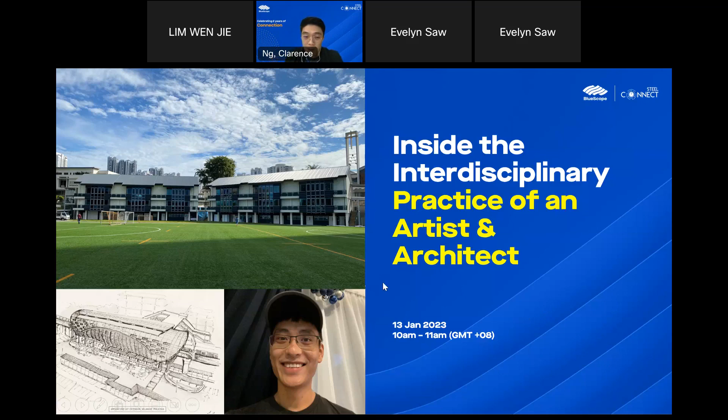Our speaker today is Lim Wen Jie, artist and design architect. He obtained his bachelor's in architecture from USM, and further studies in the Master of Architecture from UTM. As you can see, he's quite a young chap.

One of his accolades is the Asia Young Designer Awards in 2018. He has also obtained the PAM ZSR Architectural Prize and the PAM Innova Scholarship. He has done quite a bit of visual work, some of which has been featured in places like Revitalizing Penang, the 2015 National Top 50 competition winner. He was also interviewed and featured by Sin Chew Daily in 2015. Some of his works were also in exhibitions, like Asia Interface in Straits Harbour, JB, and went international - his artwork of Bukit China Market was exhibited in Slovenia.

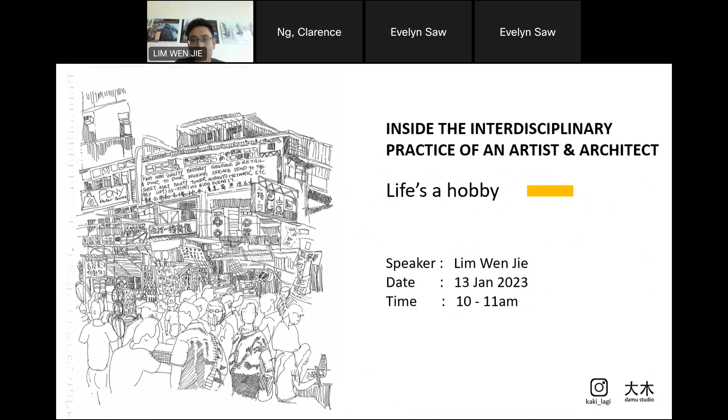Some background about me: I'm a graduate from USM for my bachelor study and currently a Master of Architecture student in UTM. I'm an architectural designer based in Singapore, involved in several projects such as sports and recreational master plans, institutions, residential, factory, and conservation work. I'm also a part-time tutor in Singapore in collaboration with an art enrichment tuition center, and I was an architectural book editor during my master study time. I'm also the founder of Damu Studio, which focuses on architectural work and artwork sharing.

Architecture is one of the classical forms of fine arts and has always had a strong association with the artwork world. So how does art enhance architecture? That's what I want to discuss today. This 45-minute sharing session is classified into three categories: the first chapter is art journey, the second chapter is public engagement, and the third chapter is the architectural path. The final part will be the summary.

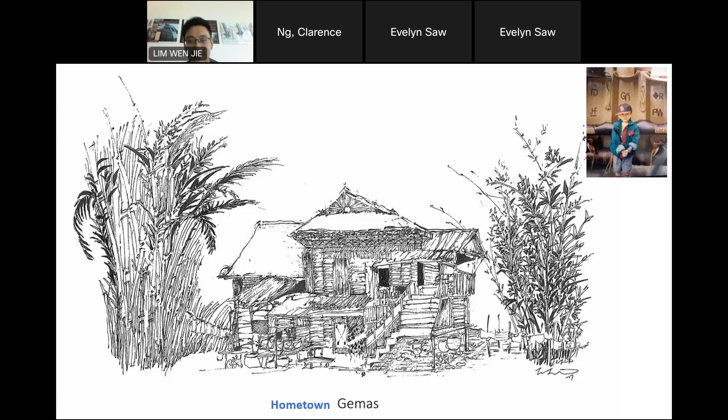In 2013, I managed to enroll in USM for my architectural bachelor study. USM is located in Penang, and Penang is very fun with a lot of good food to eat. I met a bunch of good lecturers and friends there. My first touch of urban sketching was in USM, and that's why I'm here sharing my little thoughts with you all today.

What impressed me most about Penang is the old heritage houses, and it really inspired me a lot.

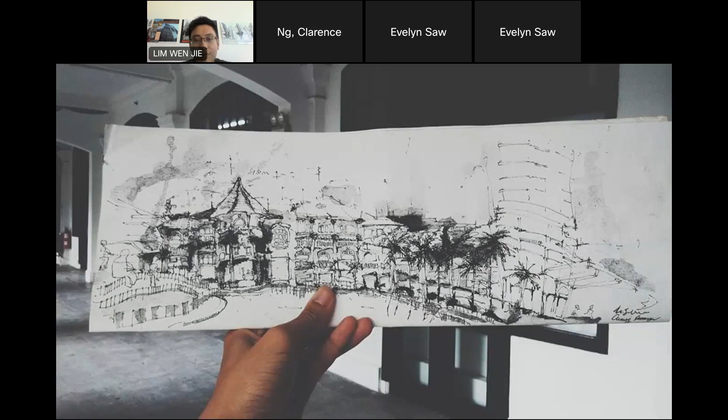This is the final product done on site, and I spent about 2 or 3 hours to finish this. I used Chinese ink as the color medium with very undefined lines to produce this artwork.

So in this picture, it's actually a Penang old shop house. If you know about Penang, this is the shop houses that a row of shop houses are located along Jalan Lim Leong, which is just next to Komtar and First Avenue.

So for me, as an architectural designer, sketching on paper is essential. Regardless how creative you are, you must do a raw sketch on paper first before the idea can further develop. Same goes for urban sketching. It trains you to become more vigilant to whatever you design.

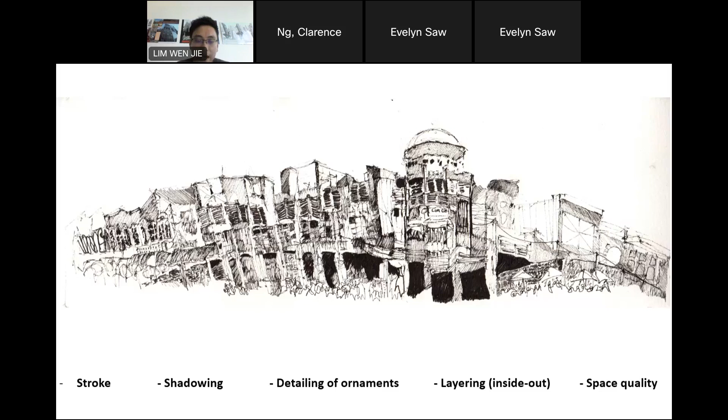This is the artwork for the Taiping Pasar. The shape of the building is somewhat defined by its line, and it's like beaten by the termites, like that's what my friends say.

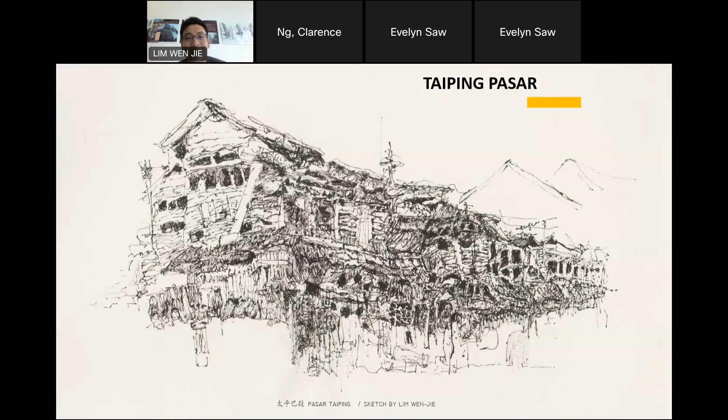It's actually a small piece of artwork, like A5 size. So this takes about like 4 hours, maybe.

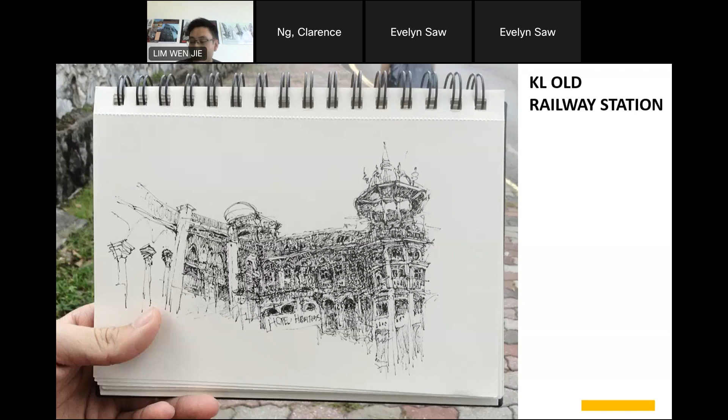This is another artwork regarding the Malacca Bukit China Pasar. For this artwork, it has been selected for annual exhibitions in Slovenia. For information, Slovenia is near to Austria and Croatia. So the highlights of this artwork is the color choice that I adopted, which is quite minimal and subtle. It really focused on the horizontality and the shadow to bring out the depth of the environment.

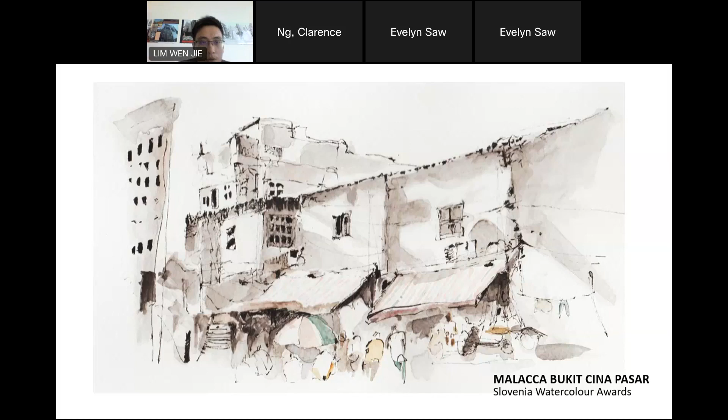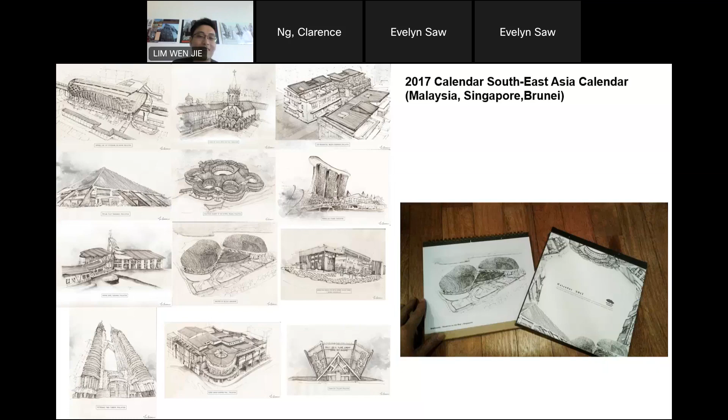So in 2017, I was commissioned by a leading roof supplier specialist to produce 12 artworks for a calendar design. The developer wanted to try something new rather than just putting up actual or real photos to represent their company profile. So I heard that the feedback is quite okay, because it's something new at that time.

So when it comes to my UTM master study, because I feel like rather than using computer aided software, I would be more handy using these manual sketches, I try to do something a little bit different compared to my other colleagues or classmates. In my master study, I'm using my sketch to deliver my idea towards the thinking of the youngsters in Students Hub. It's actually the Student Hub project. When you think about Students Hub, it must be bold, young, and fun.

Putting up the activities and the figures inside, you can actually see how the space quality is going on. Personally, I feel black and white is the best medium or mode of color that represents what you want to convey the message, because sometimes if there's too much color, it may distract somebody's attention.

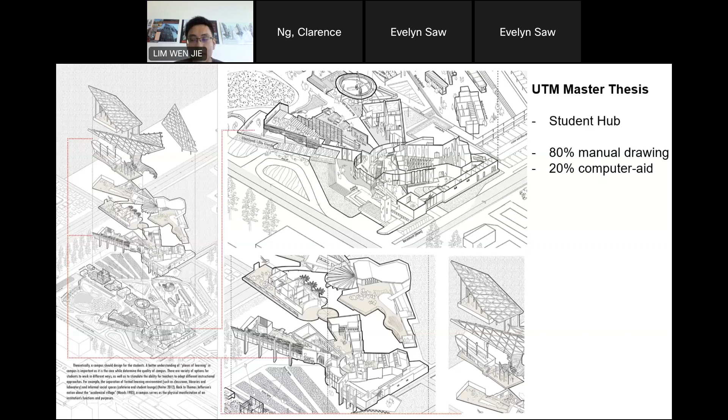So this is the zoom in view for the first story. As you can see, there are some lobbies, some amphitheater seatings, some supporting spaces, for example the cafe, the theater, and the greenery.

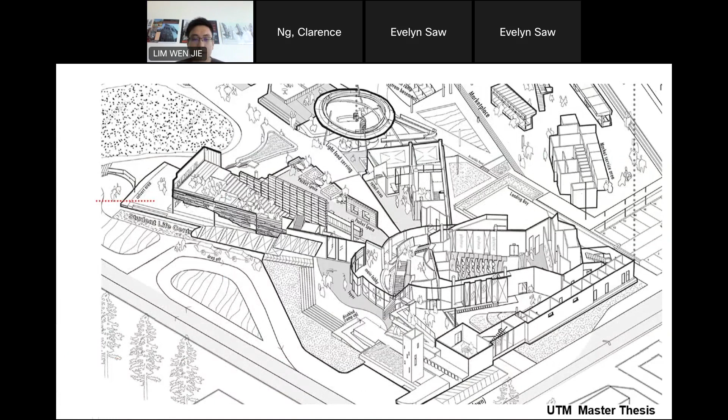So that's what chapter 1, the art journey, is about. Let's move on to chapter 2, which is the public engagement workshop.

So there are some workshops that have been conducted in JB and Singapore. My very first official workshop, or the maiden workshop, was in Rainbow Stationery art shop which is located nearby to UTM. That was actually my first time teaching urban sketch to my students, and the feedback was quite encouraging.

The people are coming from all walks of life. For example, some of them are teachers, some of them are from IT, and some of them are young students.

So the sketch topic is about the Straits Electric shophouse in Penang, and the whole session of the workshop takes about 2.5 hours. We start with the shophouse sketching, and subsequently with food sketches.

So what I want to say about this slide is actually sketching ain't difficult. What we actually need is proper guidance from someone. So the first key to success in sketching is you have to step out from your comfort zone and try a first step. That's very important.

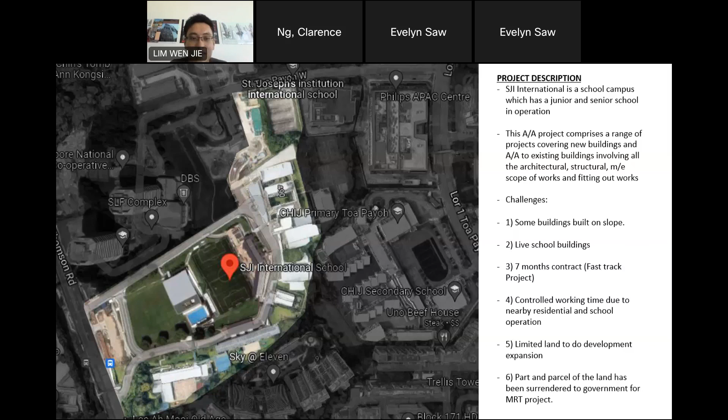The next one is the limited land for development expansion, because Singapore is scarce of land and they really have to think about how to maximize the potential within limited land. And the last one is there are some other contractors inside the site that we have to deal with.

So you can see that the new proposed buildings, number 7 and number 8, will sit on the slope, but actually you cannot see the slope. Because, okay, but actually it sits on the slope. And there are some new buildings popping out, like for example the media building, arts building, and also a science block, associated with some heritage buildings inside. So it's quite challenging, I would say.

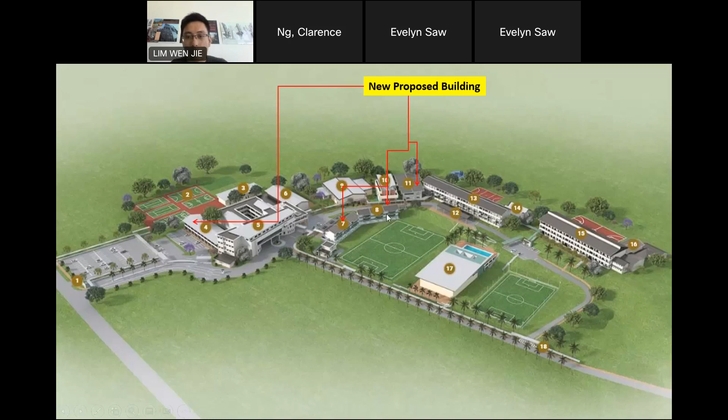Before you design something, you have to come up with some sketch ideas on how to develop further in your design and present it to the owner. Most building owners or operators like to change the design, so you have to make sure your effort is not wasted. You have to make sure the idea you develop can convince the owner, and that the money they pay is really worth it.

So you can see the sketches: the floor plans on the top left, the bottom left shows sketches of the sections, and on the right are the detailing sections of the steel structure, showing how they wrap the buildings around incorporated with the ceiling and lighting.

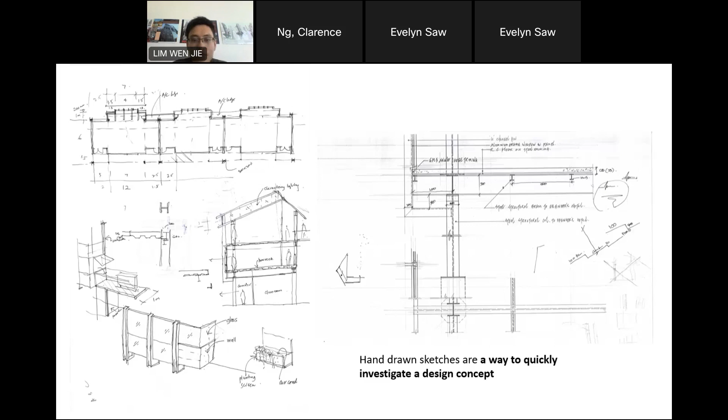One of the interesting parts about this project is we are going to build two buildings on the slope. One of the constraints why we can't build on flat land is because, as you can see on the first picture on the right side, they have a FIFA standard artificial turf that's already done.

And they can't afford to sacrifice the space for the new buildings. So worst to worst, we have to find the best way to engineer the buildings on the slope with the advice from the geotechs and the C&S.

So the site clearing and the soil nailing is one of the methods we think about to stabilize the slope. We also think about using bore piles or other better engineering solutions, but at the end we're using soil nailing due to a certain reason.

We have to see whether the existing soil condition can actually cope with or withstand the load of the three-story buildings, and to justify how many number of soil nails to be inserted into the soil bed.

So as a main structural building frame using steel, how can we gain some points in a green mark? Green mark, for information, is equivalent to GBI in Malaysia. Other countries, like in Europe, they also use a standard called LEED. They are quite similar, which I will talk about later.

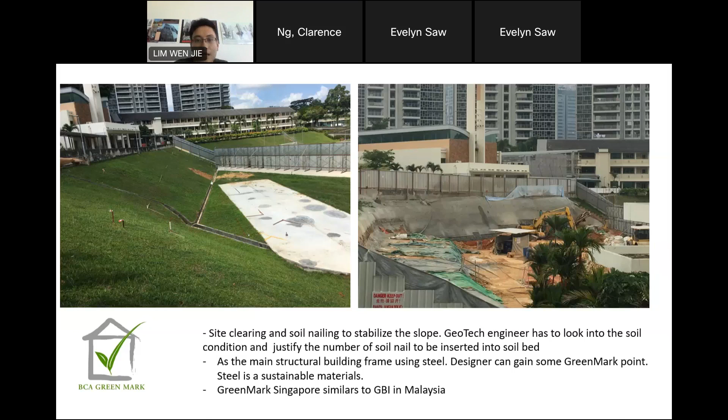By using steel to construct the main frame of the main building, it really helped to save a lot of time, which we can match with the target timeline. As I mentioned before, we have a very fast track project, only 7 months.

And there's a lot of people overlooking these projects because they have a board of committee and all that. So we must make sure what we decide is really correct and follows the correct path.

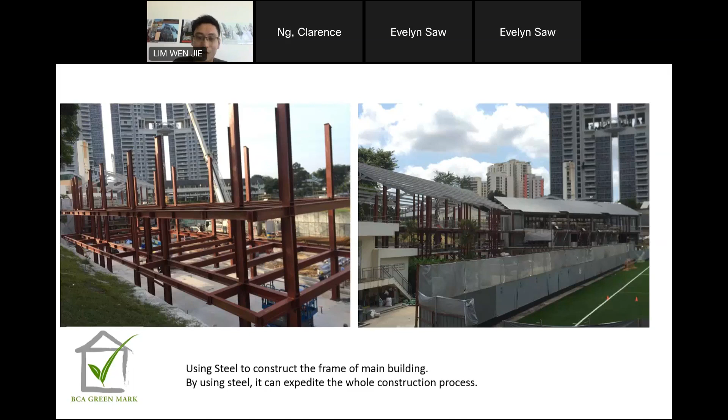So other than steel, how can you gain some points in the BCA Green Mark assessment? It is by using tempered laminated or heat strengthened glass, to gain I think 1 to 2 points, depending on the coverage of the windows parameter.

So in this particular project, we decided to use a DGU glass - dual glazed unit, actually. What is so different between DGU glass and normal tempered laminated glass?

Because tempered laminated glass, in the common market, has 6mm plus 1.52 adhesive plus another 6mm glass sandwiched in between. But for the DGU glass, they have 6mm with an air gap of about 6mm airspace, and also 6mm of another green glass. So the difference is the gap in between, which is more than the common tempered laminated glass.

The transmittance value for this glass selection is 43%, and the reflectance is about 8%. Why we choose DGU glass and not normal tempered laminated glass is because the building orientation we are facing right now in this project is facing to the west.

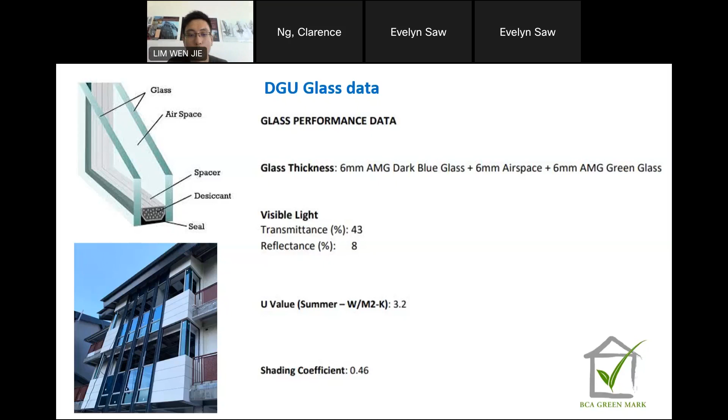So a short summary about this project: the building orientation is not in our hands because of the site constraint, so we can only follow whatever we have. The orientation is facing to the west. If you can choose, of course try not to choose facing west, but we had no choice. That's why we used DGU glass to solve this issue.

The second point I want to emphasize is the roof selection can also gain some points in BCA Green Mark. You must remember for the roof, try not to choose very bright colors, and try to choose darker colors.

So you can see in Singapore, BCA now encourages having black painting of the buildings, for a certain reason - one of the main reasons is it can prevent glaring to the neighbor, especially in the downtown area.

The glass that you propose sometimes is too glaring, so they want to make sure the glass you choose is more on a dark color, maybe bluish green or greenish blue or grayish color, and also the facade itself in gray. This can really help mitigate the glaring to the surroundings.

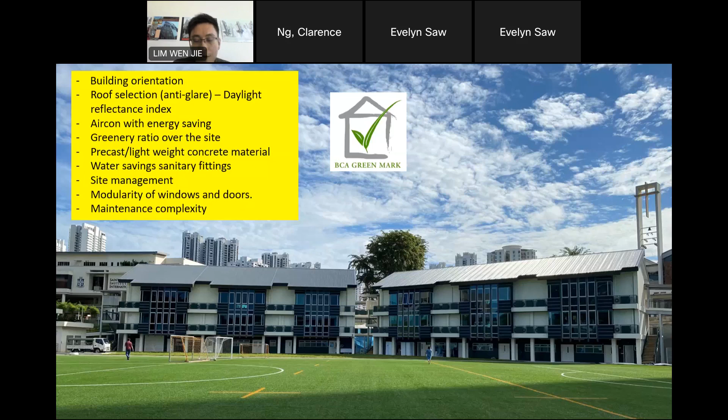So just a little background for this picture: it's actually a 3-story building, quite straightforward, and it focuses on the modularity of the windows and facade. When it comes to the construction period, it's really straightforward to design such a roof, such windows, and the spatial planning.

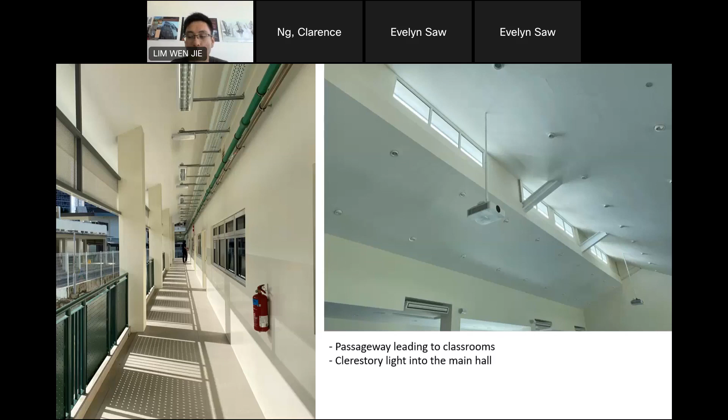The clerestory lights on the right are the day lighting we intend to bring into the multipurpose hall, but of course with a certain limit on the fenestration of the light. If not, it will be very hot and will consume a lot of energy.

So the next project sharing is the Bedok netball and futsal hub. It is an ongoing project, and it is a design proposal to the sports council.

The type of project is sports and recreational, and the type of development is netball and futsal. It is purely a sports facilities project with no F&B, just netball and futsal.

The client is the local sports council, and the location is at Bedok North, quite far from the city area. The estimated site area is about 5.6 acres. The proposed GFA is about 3,445 square meters, and the plot ratio is 0.15.

Why the plot ratio is very low is because they want to maintain the surrounding environment to be low and down to earth. The estimated built-up area is about 40%, and the landscape is about 60%.

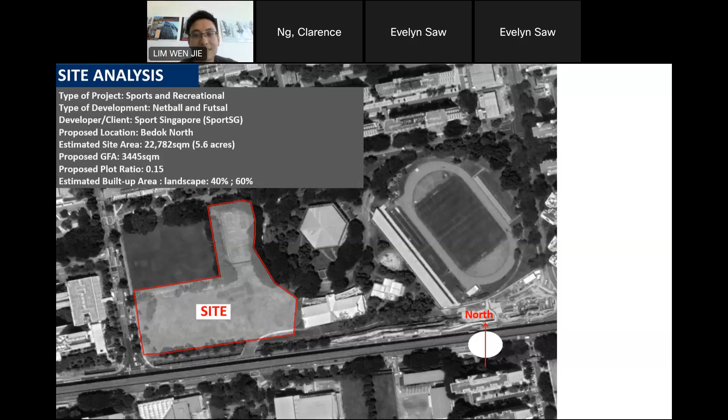Before we start to develop more on the design, we have to study how we can utilize the site to make it more fun for the local community. Because when we designed this site, one of the requirements from the Sports Council was to make it more engaging for the public, since it's surrounded by a matured housing estate.

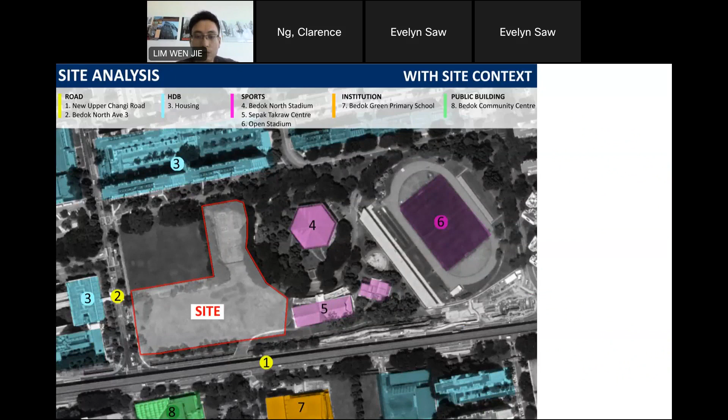So with the odd shape of the site, we have to consider 3 main items as requested by the Sports Council: the netball area, the futsal area, and the facilities block area. But unfortunately I don't really play netball and futsal, so I had to study the international standards for this so that I could propose a design.

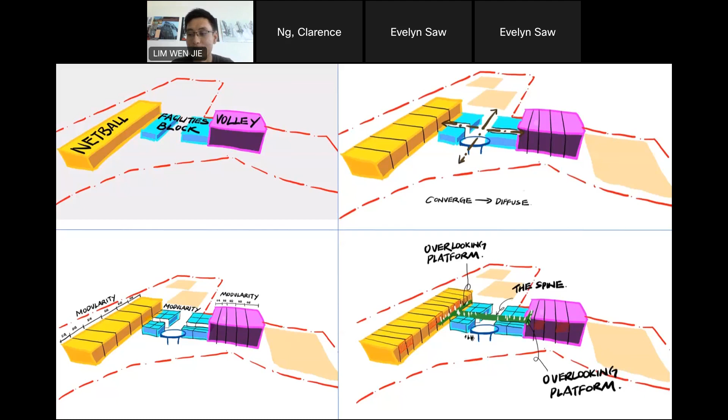So at the end, these are some sketches you can see.

So they have some sheltered netball courts and sheltered volleyball courts. They also want to have beach volleyball, which really gives a beach kind of feeling to the site. And also open netball courts, which is on the top part.

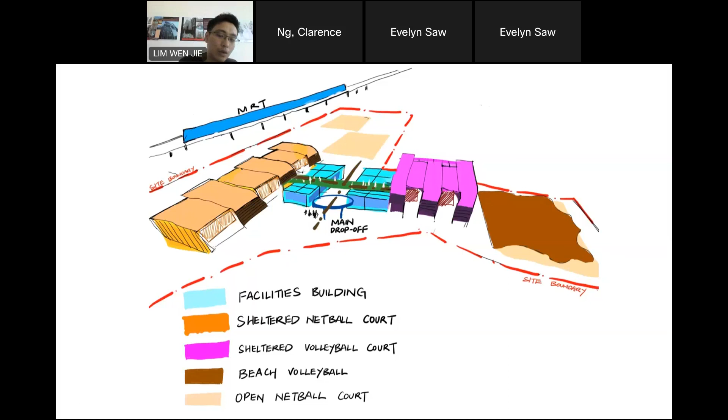So I would like to share a little bit about some of the final design of the entire space, of the entire development master plan.

This is a drop-off point, and this is the existing Bedok North Stadium, which we are going to retain - this is not in our contract. So the main circulation is along this route, and this is the drop-off area. When you reach here, you will arrive at the facilities block, for example the offices and registration counter, and also the toilets and changing room.

And then you move towards this area, which is the sheltered netball courts, item 2. And if you move to the right from this point is the sheltered volleyball courts. And then the people will diffuse from these two spaces to another area, which is the unsheltered netball courts, and to the beach volleyball courts.

So not forgetting to provide some landscape design in these projects, because it's really one of the most important requirements from the Sports Council - how you beautify the space. And as the site is more than 4 acres, we have to consider the detention pond or detention swale in order to cope with the excessive overflow of rain during the raining season.

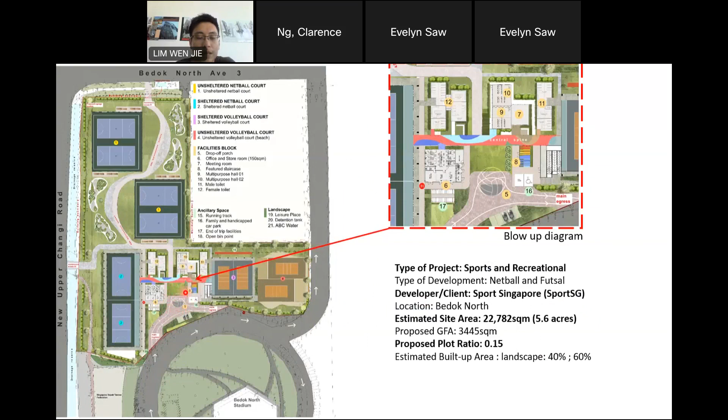So this one is the main drop-off porch, which I will describe in the next slide on how we develop the car porch. Because this project, we design for netball and volleyball, we must make sure the theme is matched and the people get a welcoming feeling when they arrive at their destinations. So we are trying to use the gene of volleyball and netball itself to craft out the design.

By using the perforated mesh and tempered glass, when you cast the shadow during different times like 9 a.m., 12 noon, or 3 in the late afternoon, you can see the shape that's thrown on the ground.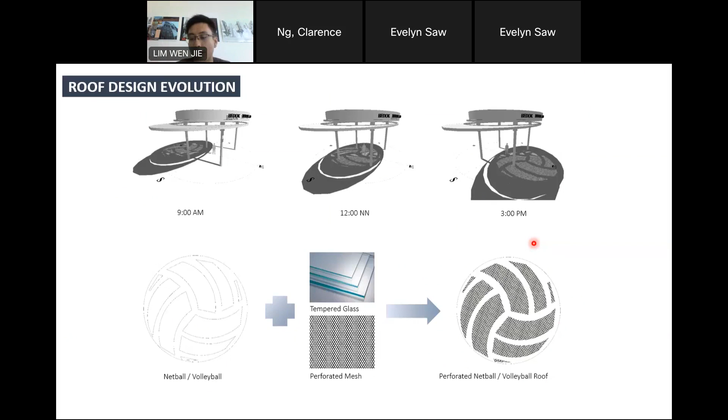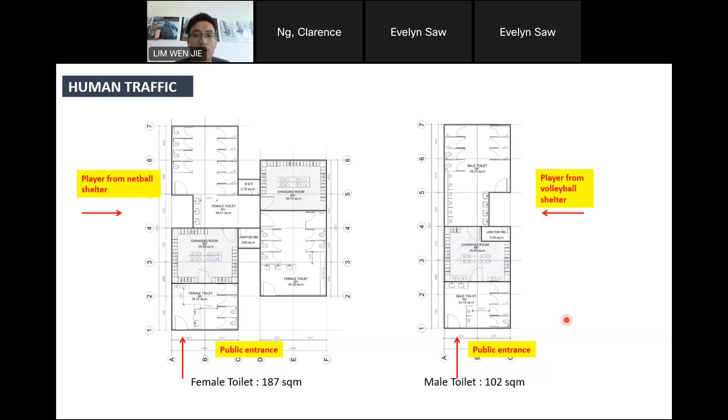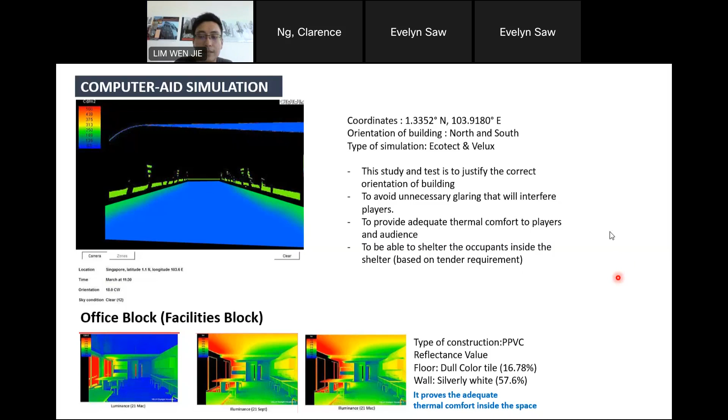Same goes for the office block - we also do some simulations to test what's the best thermal comfort. So the type of construction for this design we are using is PPVC. What is PPVC? I will talk about that later. So you can see this is the rendering of the project.

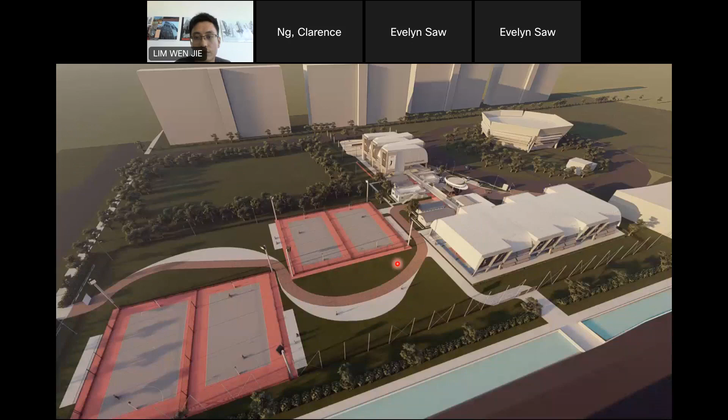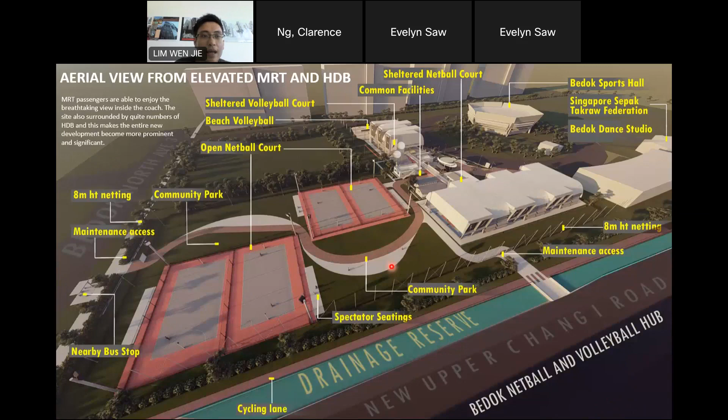Okay, so this is another view, the look down view from the MRT viaduct. And you can see that if I'm the MRT passenger, I can actually look down and really see the design of it.

And this curve is the connection from the nearby bus stop to the sites. All the cars will stop here, and the people surrounding will come to the sites and enjoy the facilities and the spots provided.

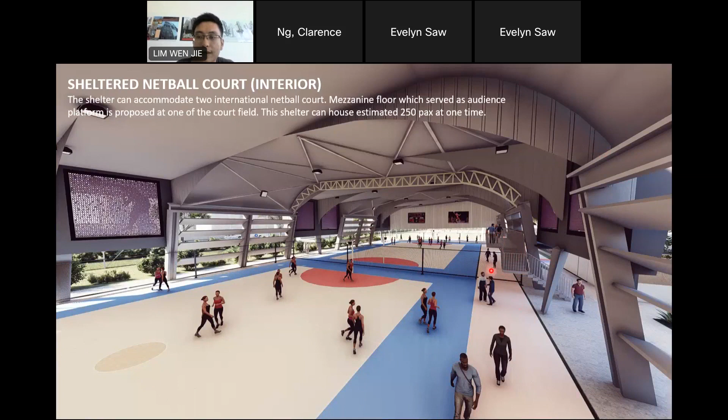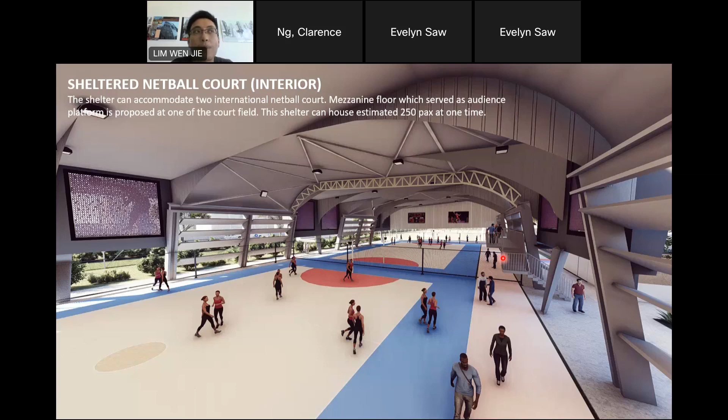Some interior for the sheltered netball courts for reference. This shelter can accommodate 2 international netball courts. There is a mezzanine floor, which serves as an audience platform and can house an estimated 250 pax at one time. The height is about 14 meters, which is compliant with the international standard.

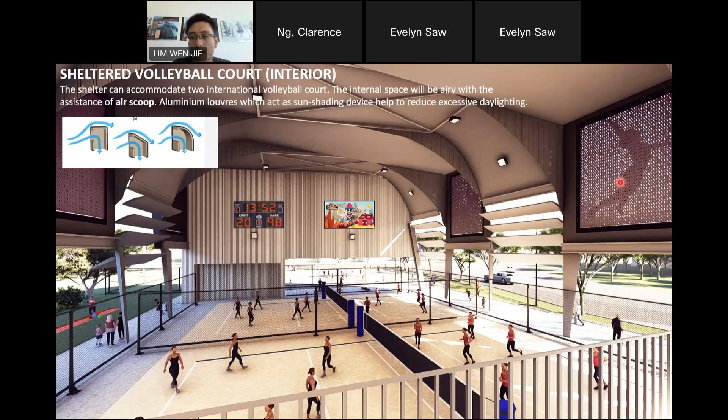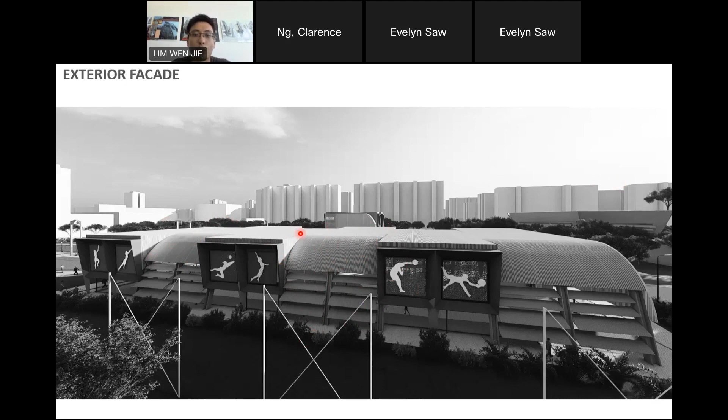This is the exterior facade of one of the sheltered netball courts. You can see the air scoop fins, and also the aluminum fins. And also this is the roof, the curved roof, which is repetitive in some way. I will talk about the roof design later.

Before I go further into the roof design for this particular project, I will talk about PPVC, which is prefabricated, pre-finished volumetric construction. What is that? Actually PPVC is equivalent to IBS in Malaysia, and PPVC is the standard terminology used in Singapore. So actually it's the same.

The construction method is three-dimensional modules which are completed with internal finishes, fixtures, and fittings in an off-site fabrication facility, before it's delivered and installed on site. It's actually similar to the IBS system in Malaysia, as I mentioned. So for the toilets and offices, it comes with modular construction.

It's like a Lego, you just duplicate from one module to 1, 2, 3, 4, 5, even more than that. It depends on how complex the so-called box is. Because this is only a one-story building, it shouldn't be an issue for PPVC.

One of the tender requirements from the Sports Council is, maybe in the future, because the tenancy of the site is about 10 years, if the local authority wants to redevelop into something else in the future, they can easily dismantle and fabricate elsewhere. It's like a Lego concept.

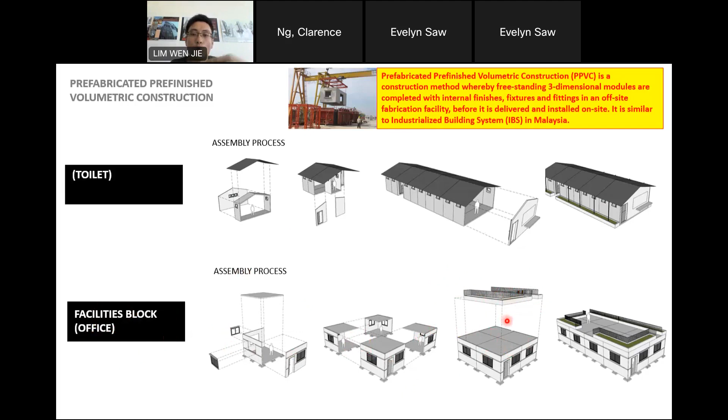So we want to try something new. Can we really use PPVC in a very huge structure, for example the netball courts? Can we make it modular? Why not, right?

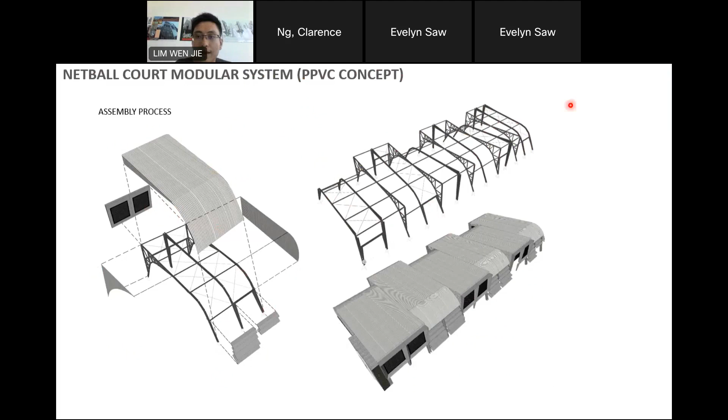You can see this isometric view for this. It comprises a few components inside, and this is the portal frame of steel, and how it really combines together to form a netball court.

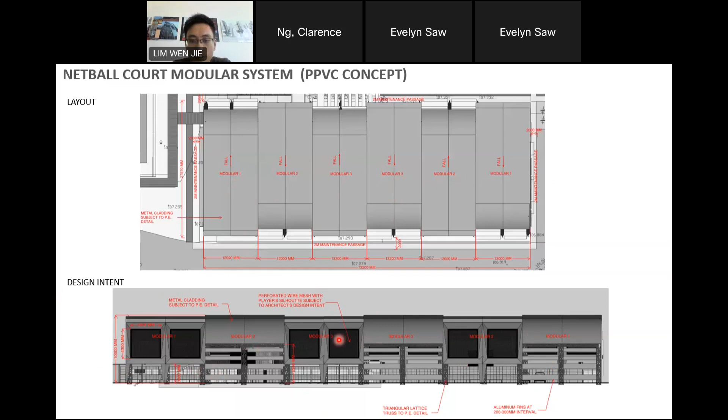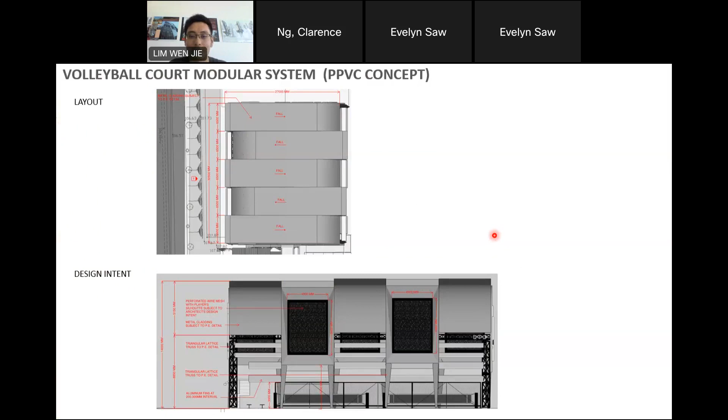Okay, I hope you guys understand the projects that I have discussed just now for the St. Joseph School and also the Bedok master plan. Okay, when it comes to the summary, right?

So actually what I want to emphasize is, from paper to built product really gives me a sense of satisfaction, especially since this is a completed project. So I really appreciate that my parents gave me this kind of skill to pursue my study, so I won't feel really stressed along the way.

Now what I want to emphasize is the learning curve is very long, and keep trying new things. During my study time, I conducted a workshop for people just to try something new, which really helped me know a lot of friends around me. Same goes for how music relates to architecture, how cooking relates to architecture, and how marketing relates to architecture.

Because hobby is very important, please make use of your hobby. If your hobby is like to sleep, maybe you can see how sleep can relate to your architecture. I like to teach children how to sketch, and meanwhile I'm also pursuing how to find a balance point to leverage my hobby and career.

Because some of my friends ask me whether I should change my career to become a full artist, but I'm saying no. At the moment I'm not really thinking about that, so I just focus on architecture, because architecture is very fun, compared to other professions.

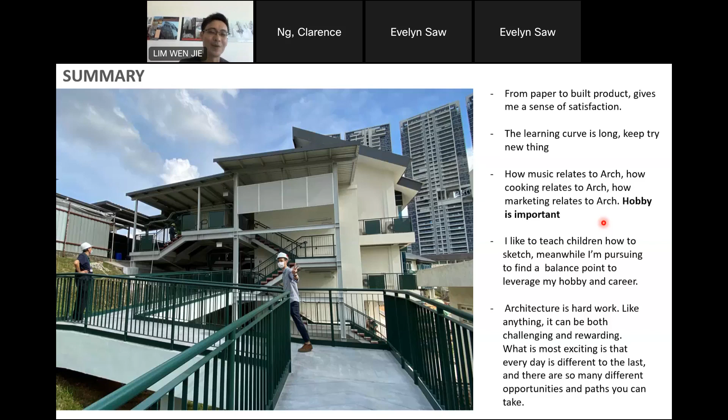So thank you, Lim Wen Jie. That was a very inspirational sharing. We went through extreme spectrums, from art we became really detailed into architecture. Okay, let me just quickly hijack the screen.